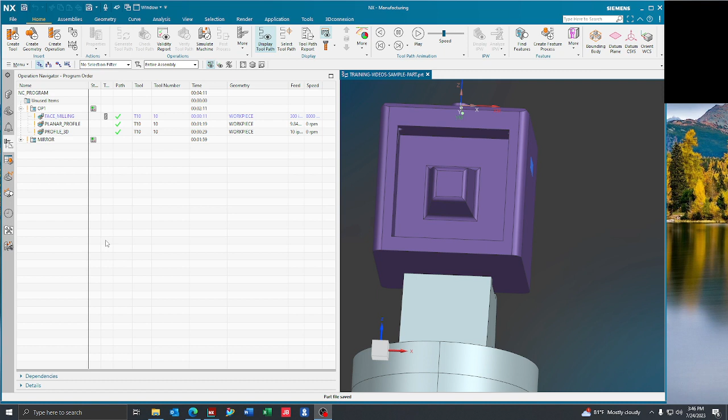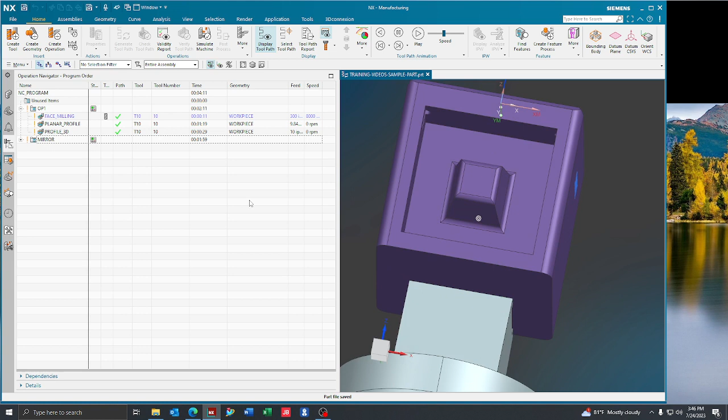In NX, you do not need to have an actual hole in order to drill a hole. So if we look at our part here, we have this pocket with this tapered box in the center of it. Maybe this is hard metal, and we need to have a start hole, because ramping down to the bottom of this pocket to high-speed machine it out might tear up the bottom of our tool, which we don't want. So not having a hole, we still need to drill a start hole.

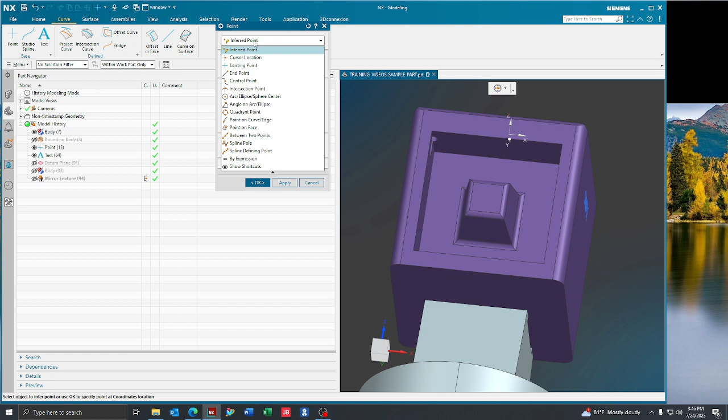The way we can do this is with datum axis point drilling. We can go to Application, Modeling, and then we're going to do a curve, create a point. Now we're going to toggle down and go to point on face. What I'm going to do is drop a point right here on that face, and that's going to be my start hole location. I'm going to go ahead and say OK.

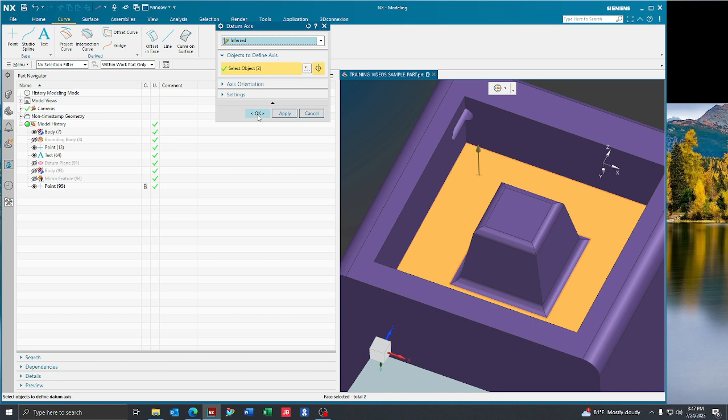Now you can see that we have a point there, and it also built that point over in our modeling tree. So if I go to Menu, Insert, Datum, Datum Axis, this is only accessible in the modeling function. I can click Inferred, and what I can do is click this point, and then click the face, and it's going to give me a datum axis on that point, or a vector. I can then say OK, and once again it will build that in my modeling tree.

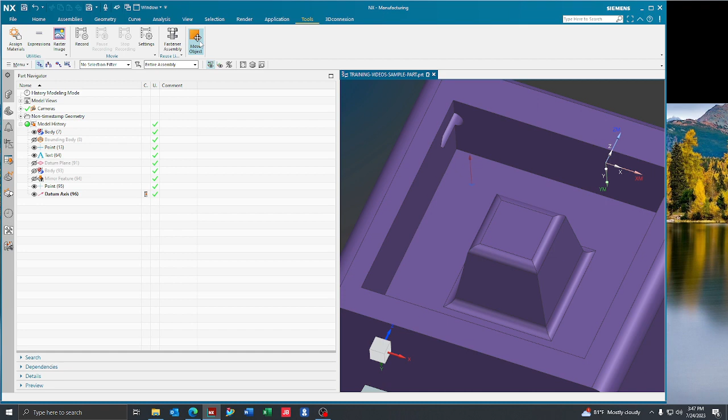So now that I have a point and a datum axis, I basically have a location to drill and an axis to drill on. I can go back to Application, Manufacturing, and then go to Tools. What I'm going to do is say Move Object, select that point, and choose the distance function.

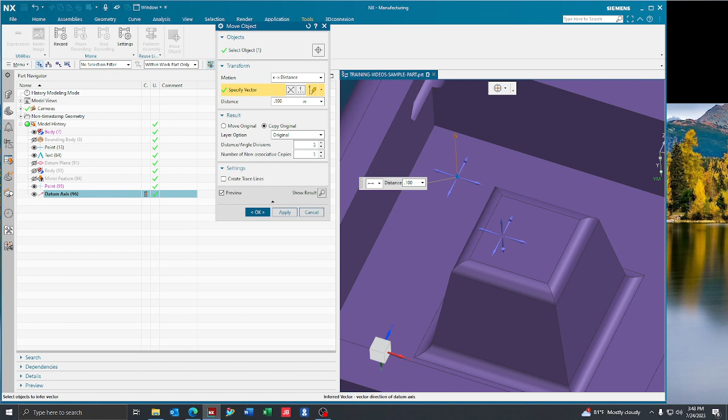It's going to ask me to specify a vector. I'm going to click that datum axis that I just created, and push this point up, let's say 100 thousandths of an inch. Make sure I'm on copy, and say OK, and now you can see that I have 2 points here. Since this point that I just made is a copy of a point, it's going to be located in non-timestamp geometry right here, just for your reference.

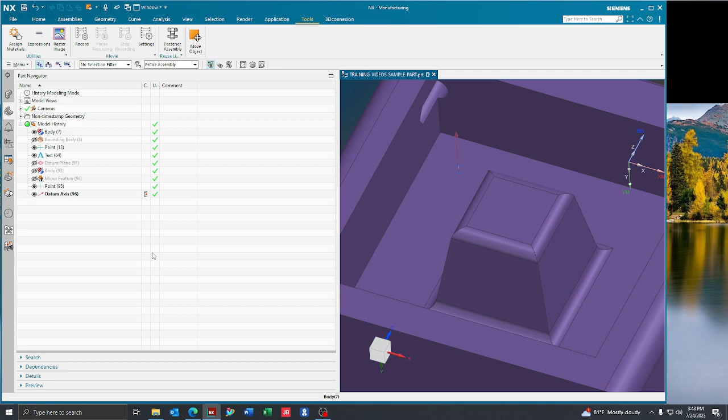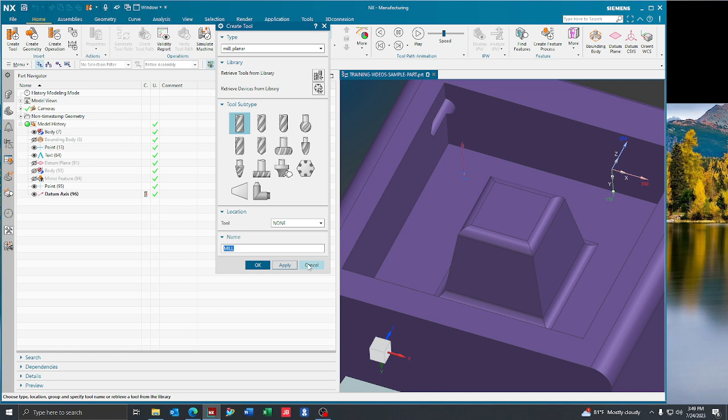So now that I have my datum axis and my points, I'm going to go ahead and drill this hole. I'm in Manufacturing, going to Home, and I'm going to create a tool. I'll grab a tool from my library here - that's just going to be a 1/4 inch drill. Right here, we'll go ahead and just say OK, cancel. I have my 1/4 inch drill here.

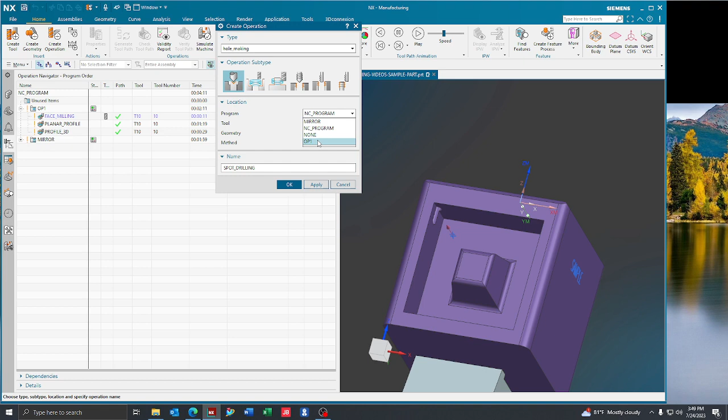I'm going to grab and drag this out because I don't want it in my right angle head. So here is my drill. What I'm going to do is go to my program, create operation, drop down to hole making to do a drilling toolpath. I'm going to pick my first drilling operation. We'll throw this in my op1 program, and select this 1/4 inch drill. Say OK.

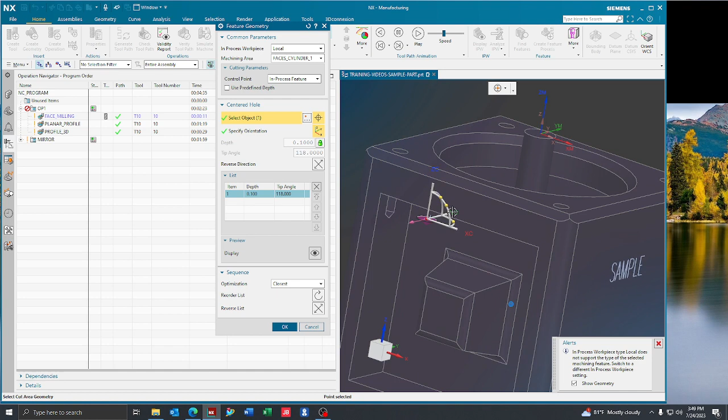Now, when we go to our specify feature geometry for drilling, I can actually click that point that we copied, and that is what I'm going to drill. Now, if you look at this, you can see that the z-axis is the same as our MCS, so is our y and our x. We're going to drill this hole from the side, so that clearly isn't going to work.

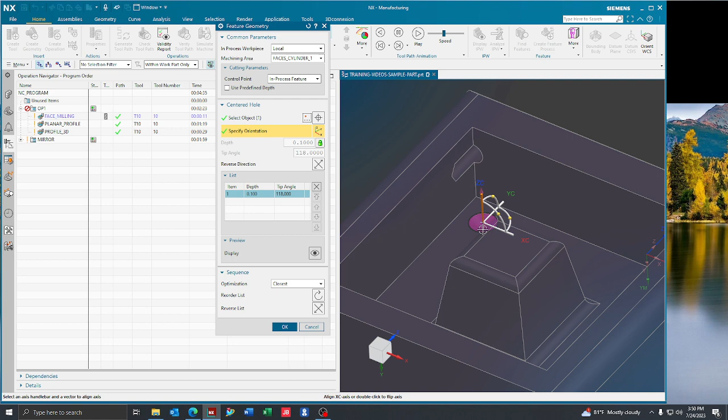That's where the datum axis comes in. We can select specify orientation, select this z leg, and then select our datum axis, and it's now going to snap the z-axis of this drilling toolpath to that datum axis for our point. So we can go ahead and say OK right there.

That looks good. Now, the reason I moved that point up 100 thousandths is because of the drilling depth. You have to give your drill a depth to go to. Even if it's only 1/10 of an inch, it must have a depth. So I can go ahead and unlock this for my depth, and I'm going to put 75 thousandths here.

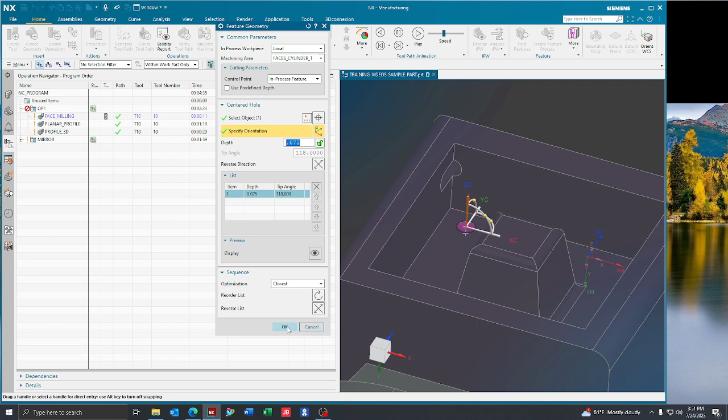That way I am staying 25 thousandths off the floor with my rough start hole drilling toolpath, and I'm as close as I can pretty much comfortably be while still roughing the hole in and not being in a finishing state. So I'll say okay, and we'll leave this alone - we'll assume it's a carbide drill and it can go in single pass. We'll go ahead and generate, and now you can see there is a toolpath created there.

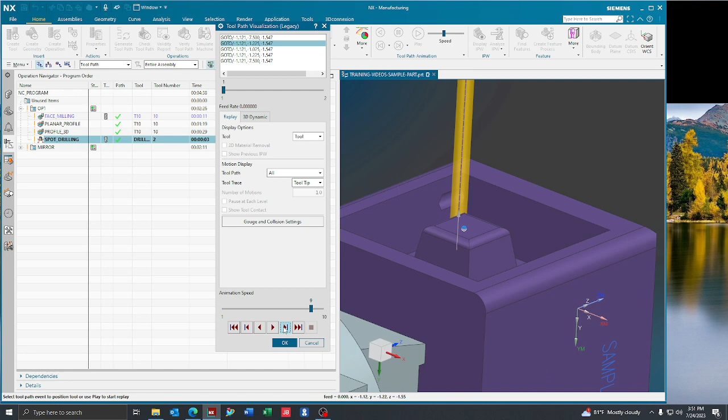Now looking at this, if we verify and replay, you can see in the traversal motion, which is your dashed blue line, it's going to rapid to that location right there, which is inside the part. We clearly don't want that because that's going to crash the machine.

So we'll go back into our spot drilling operation, into our cutting parameters, and we'll go ahead and extend this up an inch instead of 1/8 of an inch. And we'll say okay, generate that.

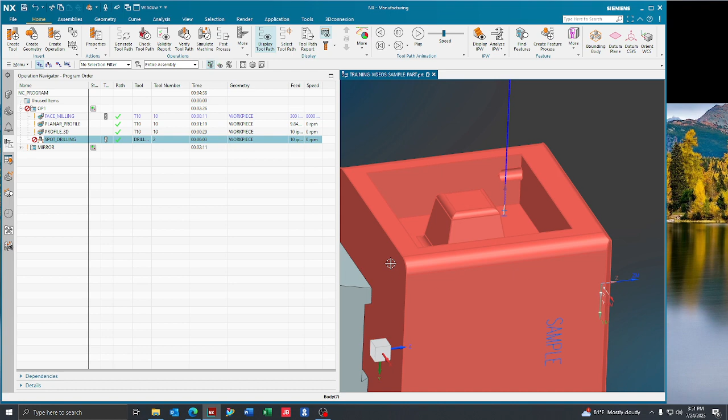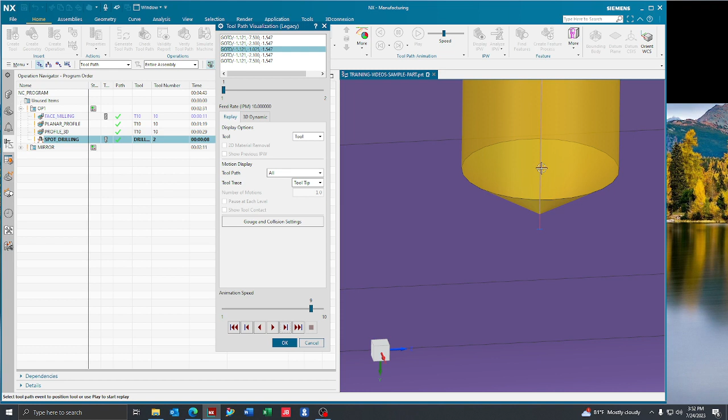Now you can see that where we're feeding from, that blue and white dashed line is above the part. So we can verify now, replay, and now it's going to rapid to that location, drill our hole down within 25 thousandths of the floor, being the floor point is 0, and this point here being 100. Then our next step is going to be retract up above, and then traversal out to our clearance plane. And now you've drilled a start hole in your part.

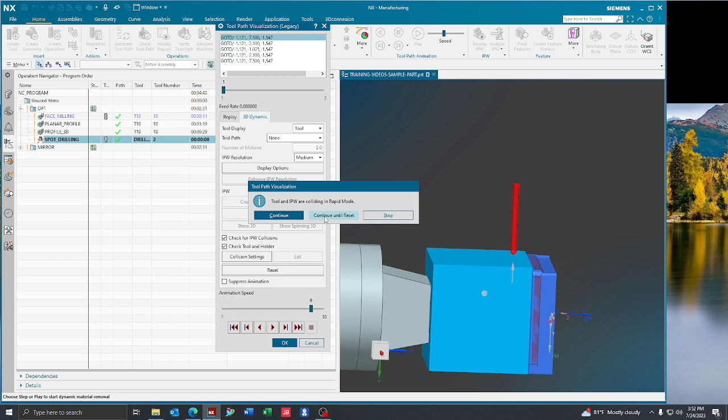So if we go back to verify, to our dynamic, we can one step. I haven't faced this off yet, so I still do have a rapid collision there, but that's okay for this example. We'll go ahead and say continue. We can step this through, drill, out, clearance plane, and there you go. You have a start hole that maybe you can drop into now for your next toolpath or your rough machining or whatever you might need, but you did not have to have a hole on the part to do so.